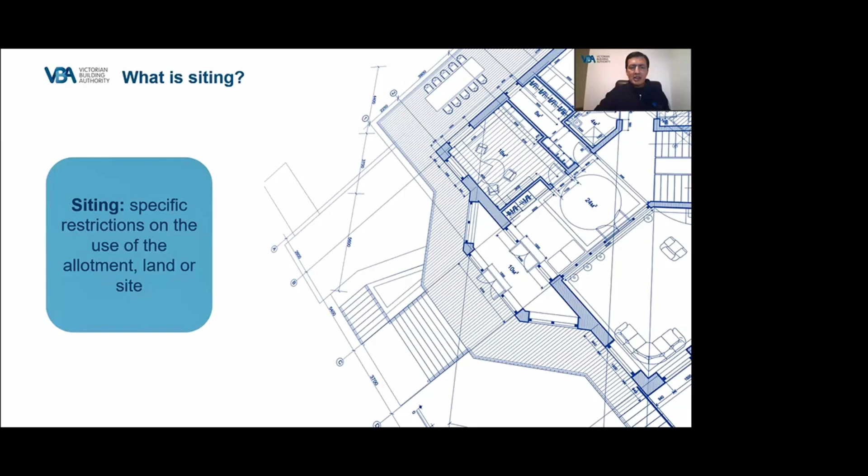To start us off, we're going to discuss siting and what it is for those who may be unaware. So what is siting? Siting refers to specific restrictions on the use of a land, allotment or site. These restrictions are put in place to protect the preferred neighbourhood character, minimise the impact from newly constructed dwellings, and protect the amenity of the surrounding properties.

The regulations consider matters such as the placement of the building on an allotment in terms of site coverage, the distance from allotment boundaries, and the height of the building, etc. It also considers matters such as overlooking into adjoining properties, overshadowing of adjoining property, provision of daylight, car parking, and required garden areas, amongst others such as placement of sheds and fences.

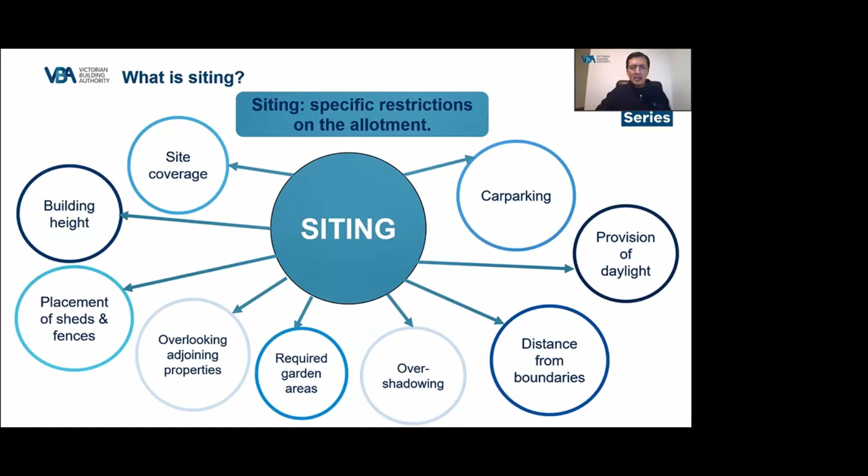We'll now move on to discuss a few matters relating to how the siting requirements of Part 5 are applied. Part 5 of the regulations contains requirements for siting matters that apply to the construction of single Class 1 buildings, Class 10A buildings and Class 10B structures, as defined under the National Construction Code or NCC, and also for small second dwellings or SSDs as they're commonly referred to.

The regulations define an SSD as being a Class 1 building that is self-contained and has a gross floor area that is equal to or less than 60 square metres, that is on the same allotment as an existing building, that is a single Class 1 building, that is not a small second dwelling.

We will be presenting a webinar on small second dwellings in August for those who wish to know more about them. You can also refer to Practice Note SI03, Small Second Dwellings, which outlines the requirements specific to SSDs and will be published on the VBA website in the coming weeks.

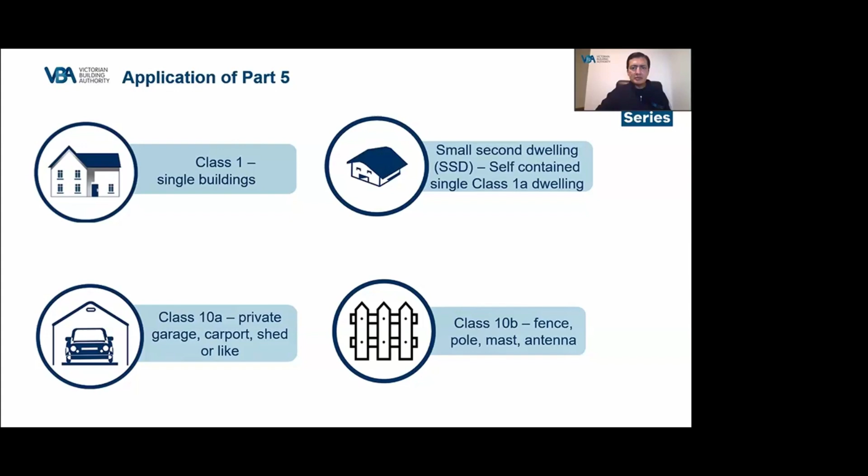The requirements in Part 5 are equivalent to those under the Victorian planning schemes, specifically Clause 54 of the Victorian Planning Provisions or the VPP. However, Part 5 of the building regulations does not apply where there is a planning permit required for the construction of the building and the relevant planning scheme regulates the same matters under the regulations.

Many of these regulations refer to an existing building or dwelling on the adjoining allotment, which is defined under Regulation 69 as being a building that existed complete before the 1st of July 1994, that has an occupancy permit which Council has a copy of, where there is a certificate of final inspection but only where an occupancy permit is not required, or that was completed and can be occupied without an occupancy permit or certificate of final inspection.

There is also a definition for single dwelling under the regulations, which means a Class 1 building and any Class 10 building associated with the Class 1 building.

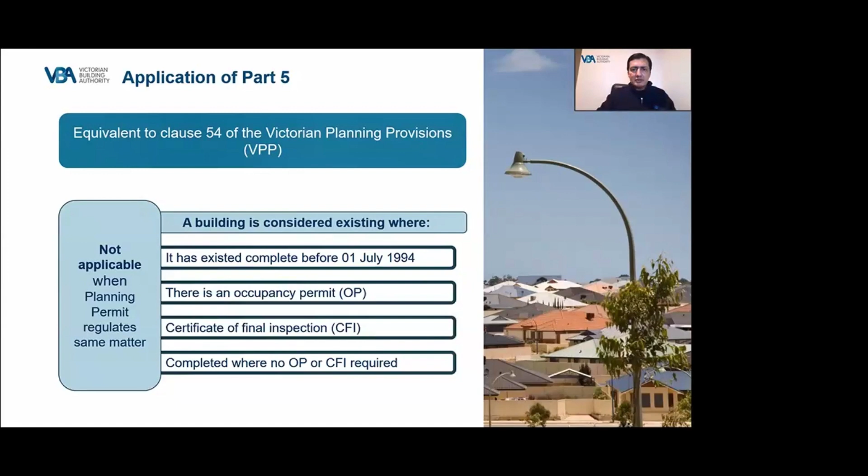The other thing to consider under Part 5 of the regulations is whether the proposed building is to be constructed in what is known as an approved building envelope, in accordance with Regulation 71.

Approved building envelopes are typically on title and are defined under the regulations as being documented design parameters that deal with the siting matters under Part 5, that are specified in a planning permit for the subdivision of land on or after the 1st of July 1994, and either made an agreement under Section 173 of the Planning and Environment Act 1987, or shown as restrictions on the certified plan of subdivision, which is on the transfer of land register.

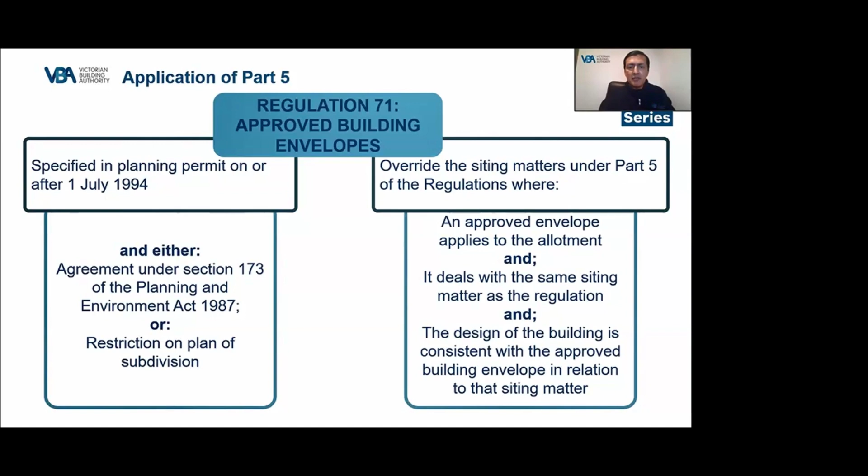An approved building envelope will override the siting matters under Part 5 of the regulations, where an approved envelope applies to the allotment and it deals with the same siting matter as the regulation, and the design of the building is consistent with the approved envelope in relation to that siting matter.

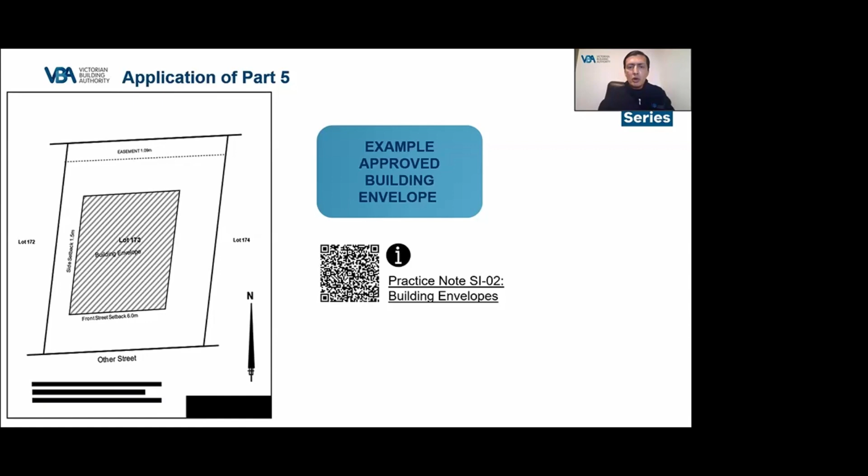We now have a short quiz for you, with the first question being: where an occupancy permit is required, a building is considered existing if a certificate of final inspection has been issued. True or false? Question 2: An approved building envelope overrides the siting requirements under Part 5 of the Building Regulations 2018. True or false? Let's see how you go.

Question 1, the correct answer is B, false. It's an occupancy permit. Answer to question 2, the correct answer is A, true.

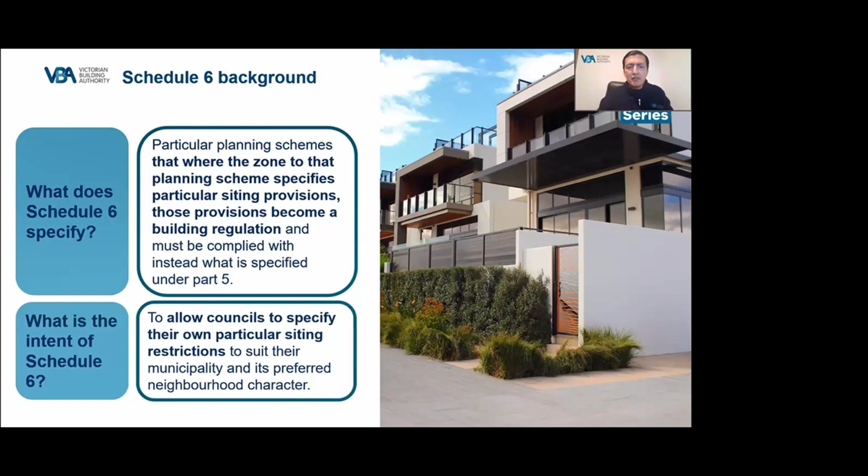The particular regulations that are affected by the planning schemes under Schedule 6 are Regulations 74.1, Minimum Street Setback; 75.1, Building Height; 76.1, Site Coverage; 76A, Minimum Garden Area; 77.1, Permeability; 79.1, Side and Rear Setbacks; 80, Sub-Regulation 2, Walls and Carports on Boundaries; 86.1, Private Open Space; and 89.1, Front Fence Height.

We will discuss some of these regulations in more detail later on in the session.

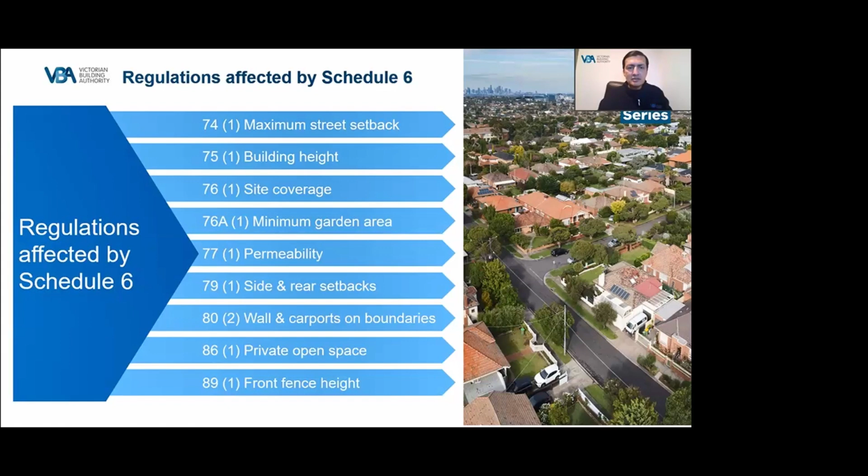While the particular planning schemes and affected regulations are listed in Schedule 6 of the Building Regulations, the exact siting restriction still needs to be determined. In order to determine this, the VBA suggests obtaining advice from council in writing as to what the exact restrictions are. Alternatively, you can access the planning schemes online to determine what the restrictions are.

We're now going to do something a little different and show you a short video on how you can access these requirements online by using the QR code or link on the bottom left of your screen.

We're now going to show you how you can access the planning scheme requirements under the schedule to the zone for the planning scheme that's specified under Schedule 6 for a particular allotment that you're considering. So if you use the QR code on the left side of the screen or the link, it'll bring you to this website, which is...

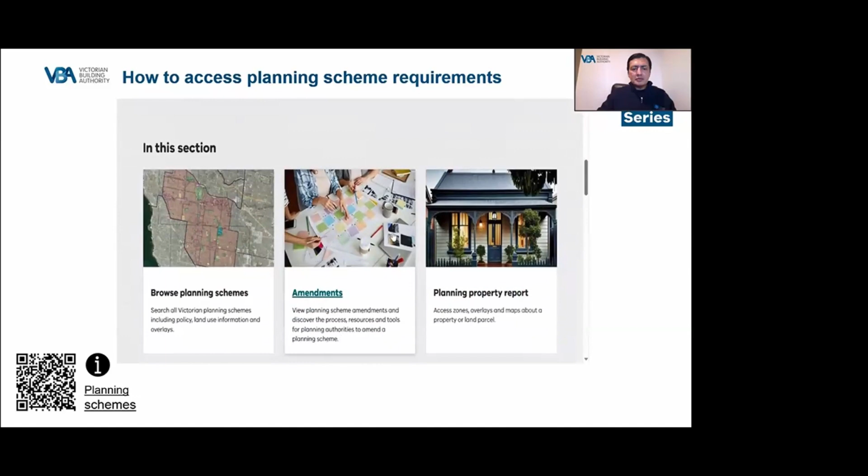www.planning.vic.gov.au/planningschemes. Now, this is the home page of that website, and if you scroll down, you'll see a number of windows. The window on the right hand side says Planning Property Report. We'll click on that one. That'll allow you to search for a planning property report for a particular allotment.

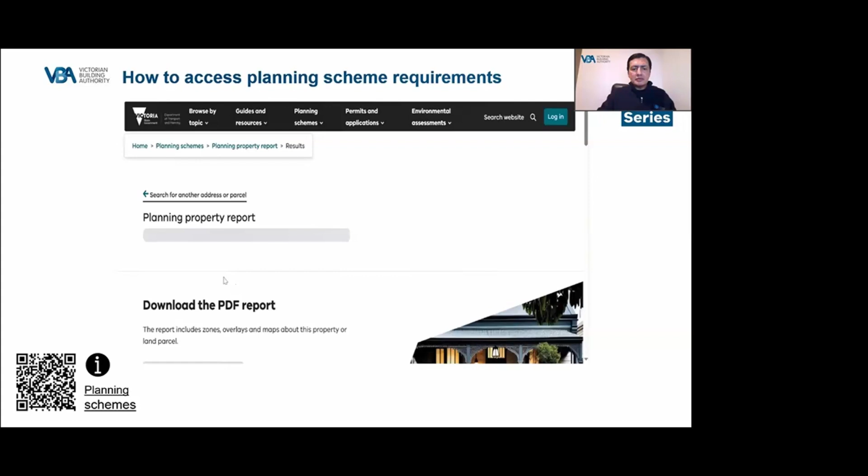For our purposes, I'm just going to pluck an address out of the sky. I'll just say number 10 and use my surname, which is Williams, and we'll choose 10 Williams Avenue, Churchill, and that will allow us to download a copy of the planning property report for that particular allotment. So we'll download a copy of this report.

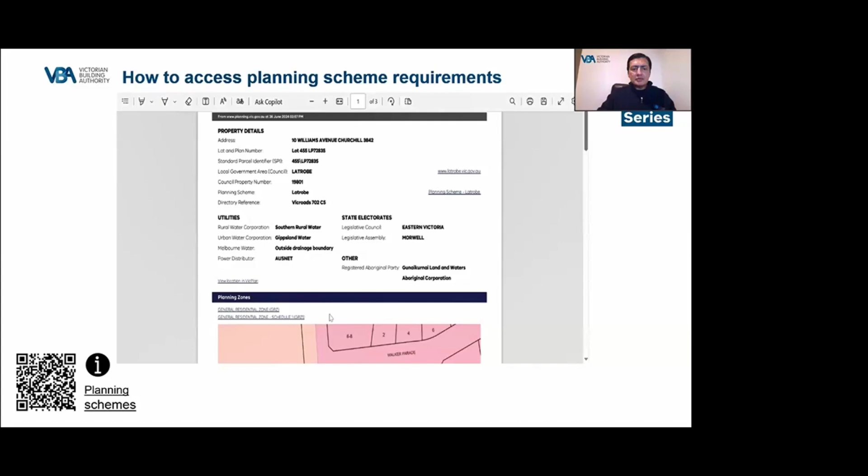This report gives you a number of requirements specified under the planning scheme. The first page shows you what the zones are. You can see marked in red, that's our particular allotment, which is 10 Williams Avenue, Churchill.

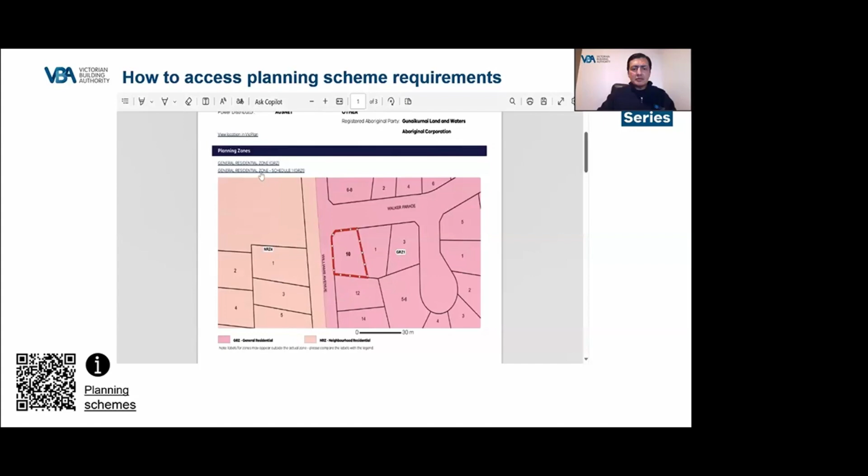Underneath the heading of planning zones, there are two links: one to the general residential zone and one to the general residential zone Schedule 1. Because the requirements we're looking for apply in the schedules, that's the link we'll choose. If we click on the link to the schedule, that should bring up the requirements for this planning scheme, which is the Latrobe planning scheme, City of Latrobe.

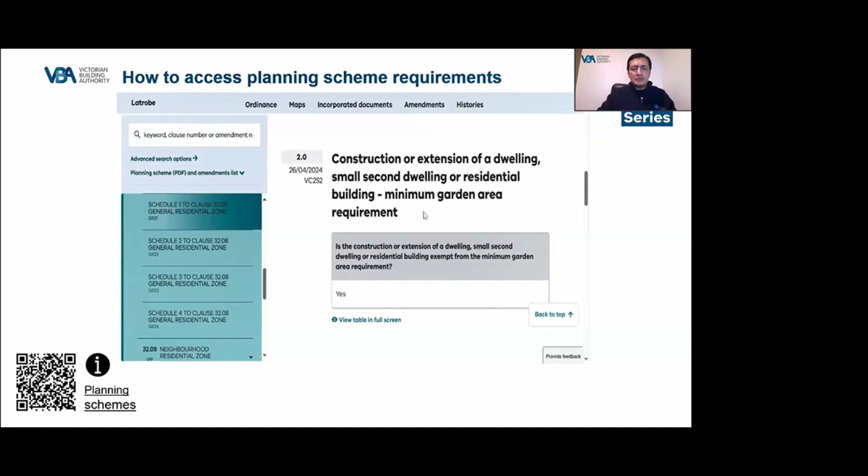If we scroll down, we'll start to come to some requirements. That one's just an exemption from the minimum garden area under the planning scheme. In that case, Part 5 of the building regulations will apply, and we will be applying those minimum garden requirements as per Part 5.

This table relates to clauses 54 and 55, 54 relating to the construction of a single dwelling. We can zoom up on that table, and this table will specify the requirements for that site under that schedule. You can see there's nothing specified for minimum street setback, nothing specified for site coverage, and nothing specified for permeability. In that case, for those three matters, the siting requirements of Part 5 will apply because there's nothing specified in the schedule.

But if we scroll down further, we can see there's a requirement for side and rear setbacks specified under the schedule, which is 1.5 metres, an increase of 500 millimetres over Part 5 of the building regulations. Because this is a specification in the schedule to the zone that applies under Schedule 6 of our building regulations, it then becomes a building regulation, and that's what must apply.

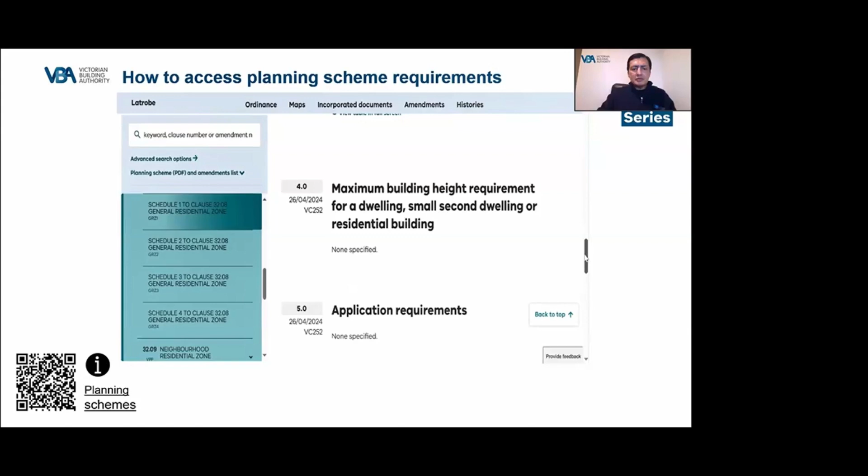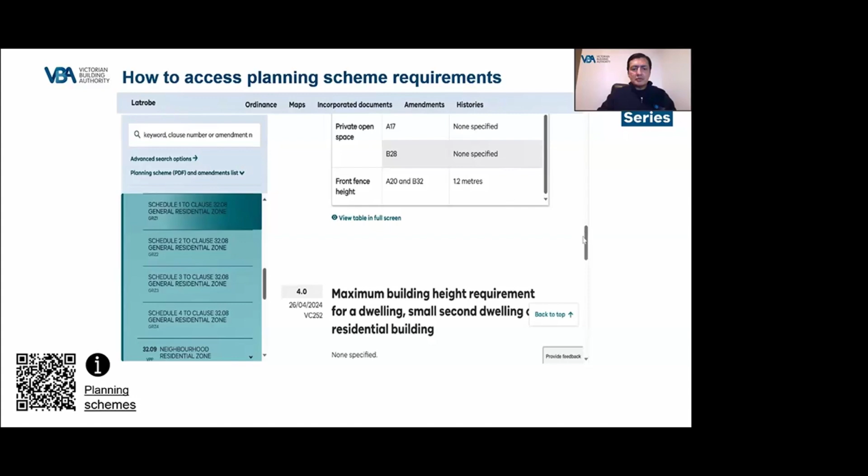So there's no further requirements under that table. There's nothing specified for maximum building height and no other requirements specified under that schedule. Therefore, it's only those two items in the table that are applicable, which is the side and rear setbacks and the front fence height, that must be applied to the dwelling in accordance with this schedule. Everything else will need to comply with Part 5. It's as simple as that.

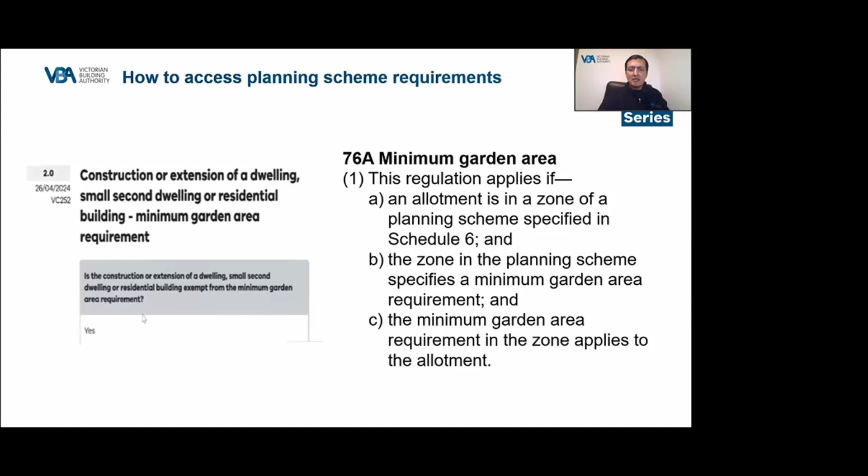So we come to quiz time again. First question of the quiz. Schedule 6 of the Building Regulations 2018 applies where: A, a planning permit is required; or B, there is a non-compliance with the regulation under Part 5; or C, the schedule to the zone of the planning scheme regulates the same matter under Part 5.

Question 2. Schedule 6 of the Building Regulations 2018 overrides the regulations under Part 5: A, at all times; B, only where the schedule to the zone in the planning scheme regulates the same matter under Part 5; or C, where there is a non-compliance with the regulation under Part 5. Let's see how you go again.

The answer to question 1, the correct answer is C. The schedule to the zone of the planning scheme regulates the same matter under Part 5.

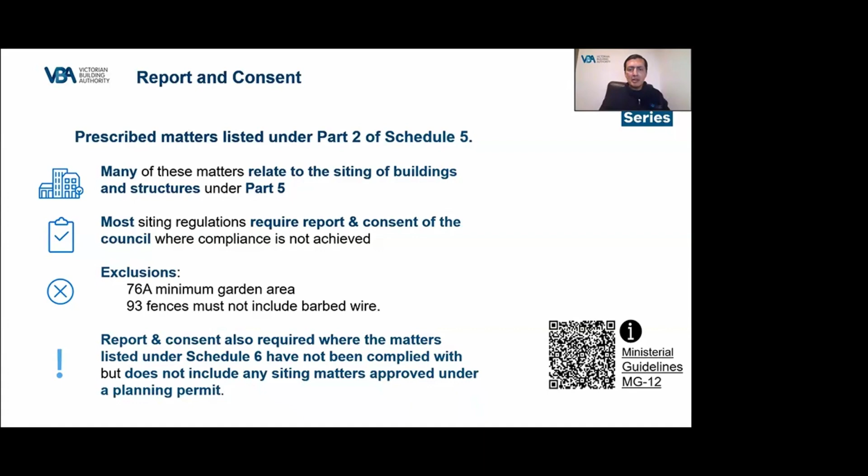Report and consent must be applied for prior to the issue of a building permit, as council are unable to issue a retrospective report and consent.

When assessing an application for report and consent, council will use Ministerial Guideline MG12 to assist in their decision making, which can be seen on the right of the screen.

The applicant for a report and consent may wish to use MG12 to assist them in determining whether the proposed design will satisfy council.

In addition to MG12, council will usually also consult with the affected adjoining property owners to determine if there are any valid objections to the application for report and consent.

It's important to note that where a building permit has already been issued and a non-compliance with a siting regulation is found, a report and consent cannot be obtained.

Alternatively, the relevant building surveyor can take enforcement action in the form of a building notice, or the applicant for the building permit can make an application to the Building Appeals Board to modify the particular regulation in accordance with Section 160 of the Building Act 1993.

We once again have a quick quiz for you. Question 1: A report and consent is not required where there is a non-compliance with siting provisions called up by Schedule 6 of the Building Regulations 2018. True or false?

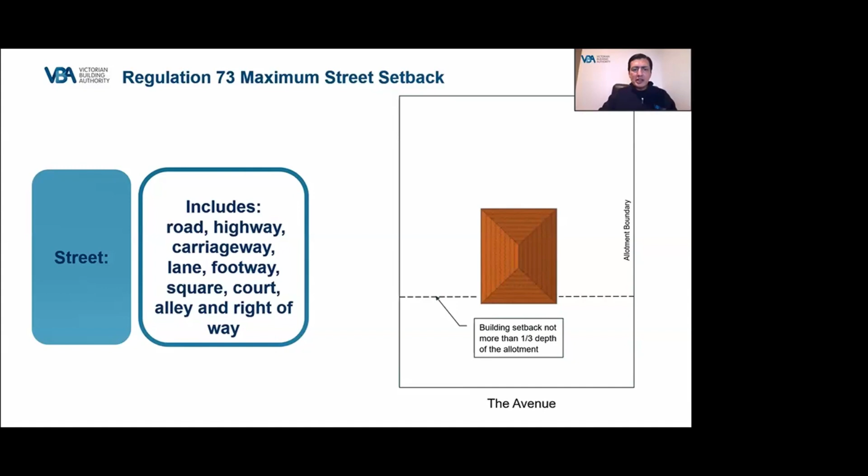Regulation 73 restricts the maximum distance that a Class 1 building may be set back from a street alignment to preserve the preferred streetscape and make efficient use of the site.

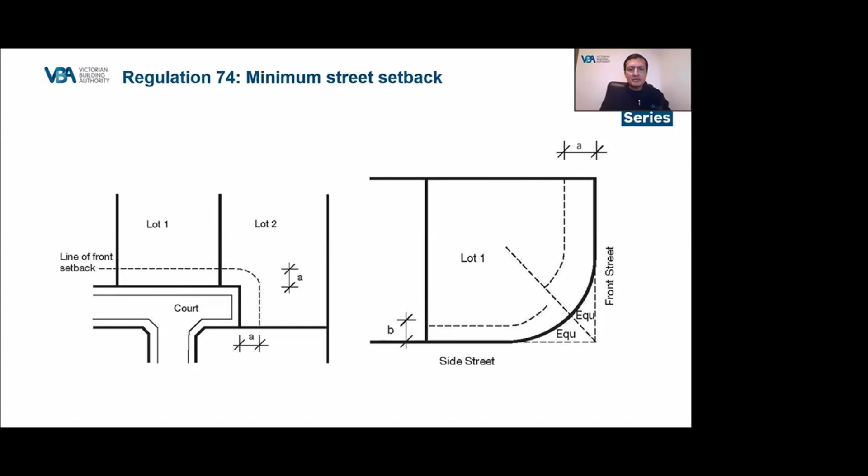The minimum street setback is measured within 90 degrees or less from the wall of a building that is facing the street. However, Regulation 74 specifically excludes a lane, footway, alley or right-of-way.

So how do you determine which is the front street alignment in these cases? Well, in these cases, it's typically the wall of the building that presents as the architectural frontage of the building that is considered the front wall of the building and is therefore where the front street setback should be taken from.

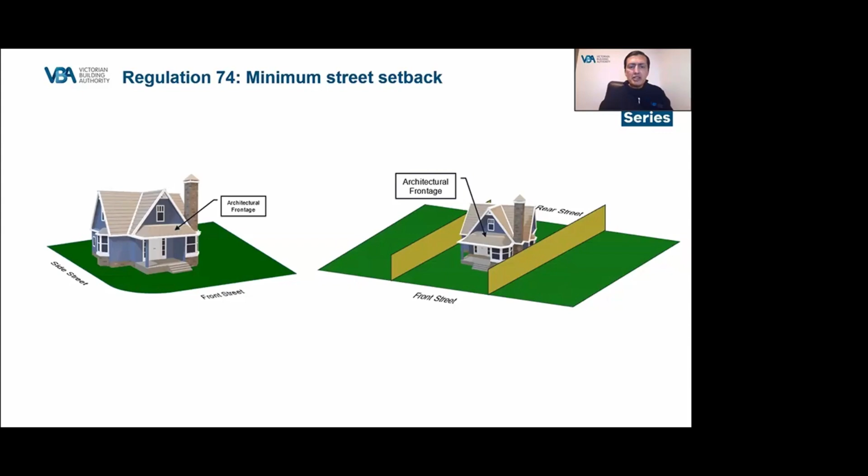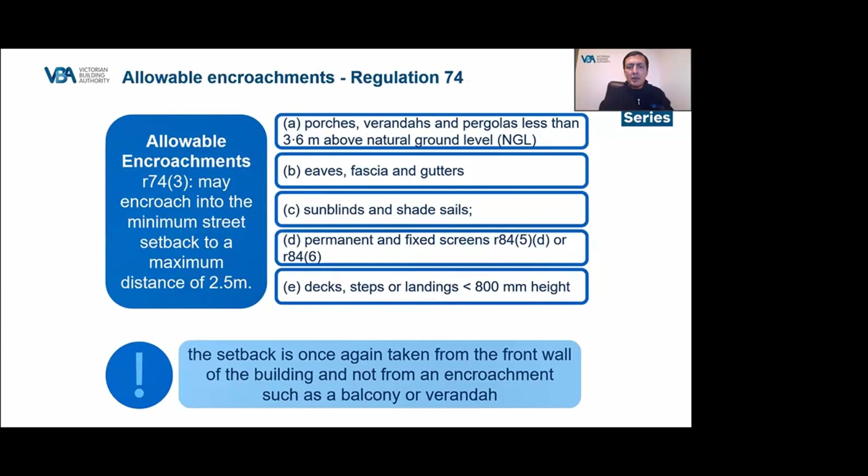There are a number of allowable encroachments listed under Regulation 74.3, which may encroach into the minimum street setback to a maximum distance of 2.5 metres. These consist of porches, verandas and pergolas with a maximum height of less than 3.6 metres above natural ground level, eaves, fascias and gutters, sun blinds and shade sails, permanent and fixed screens referred to in Regulation 84, decks, steps or landings less than 800 millimetres in height. Note that the setback is taken from the front wall of the building and not from an encroachment such as a balcony or veranda.

So how is the maximum height measured? The regulations define height of a building as the vertical distance between the natural ground level and the top of the roof covering. This means the maximum height must not be exceeded at any point measured between the natural ground level and the top of the roof. Chimneys, flues and service pipes are not included when measuring building height.

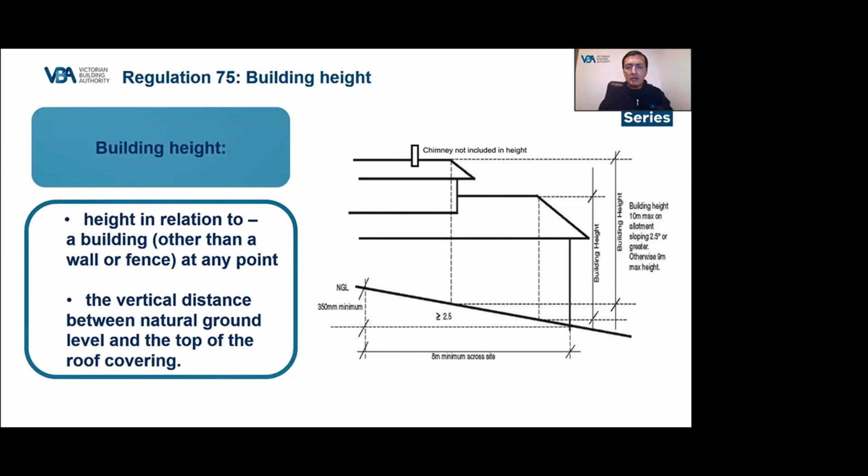So what is natural ground level then? Unfortunately, natural ground level, or NGL, is not defined under the regulations. It is typically taken as being natural, undisturbed ground. However, where a new subdivision has had reshaping earthworks, the new levels may be taken as the natural ground level, provided that the adjoining allotments across the development have also been subject to the same earthworks or are at the same level.

Sometimes it may be difficult to determine where natural ground level is, for example where the subject allotment has had cut and fill earthworks. In these cases, natural ground level may be taken as the line across the allotment connecting any two points within the allotment or adjoining allotments that can reasonably be considered natural ground level, as shown in the figure on the screen.

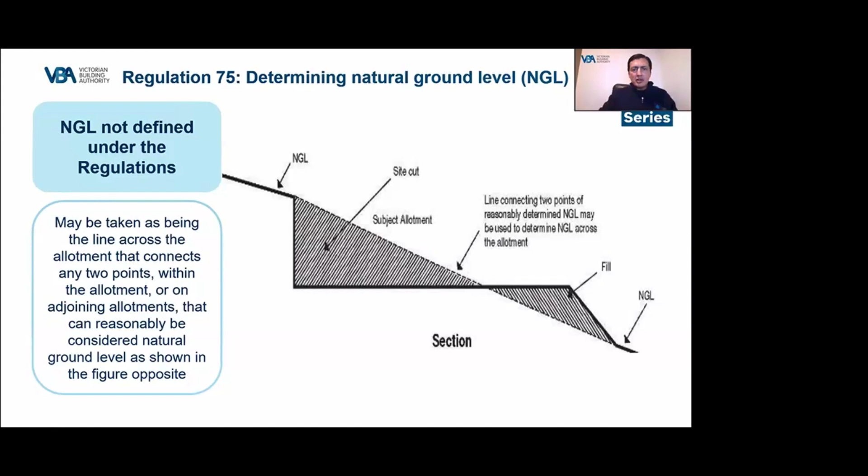The next regulation we will discuss is Regulation 79, Side and Rear Setbacks. The purpose of Regulation 79 is to provide adequate separation between the proposed building and the buildings on adjoining allotments, particularly above ground floor level.

Where over 6.9 metres in height, the building must be set back 2 metres plus an additional 1 metre for every metre of height above 6.9 metres. However, whatever the case, the maximum building height under Regulation 74 must not be exceeded without first obtaining a report and consent from the Council. It's also important to note that where the wall of a building complies with Regulation 80, the provisions of Regulation 79 are not applicable.

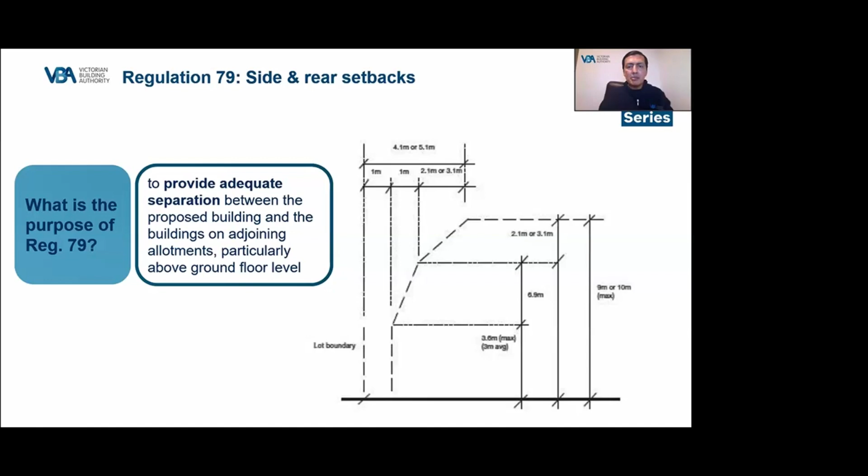There are also a number of allowable encroachments into the setback under Regulation 79, which may fully encroach into the required setback unless otherwise specified: landings not more than 2 square metres and less than 1 metre in height, unroofed stairways and ramps, pergolas, shade sails, eaves, fascias and gutters up to 600 millimetres, and carports that comply with Regulation 80. We'll discuss Regulation 80 in the next section.

There are also a number of allowable encroachments that may encroach 500 millimetres into the required setback, including porches and verandas, masonry chimneys, sun blinds, permanent and fixed screens referred to in Regulation 84, flues, pipes and rain heads, domestic fuel tanks and water tanks, and heating and cooling equipment and other services.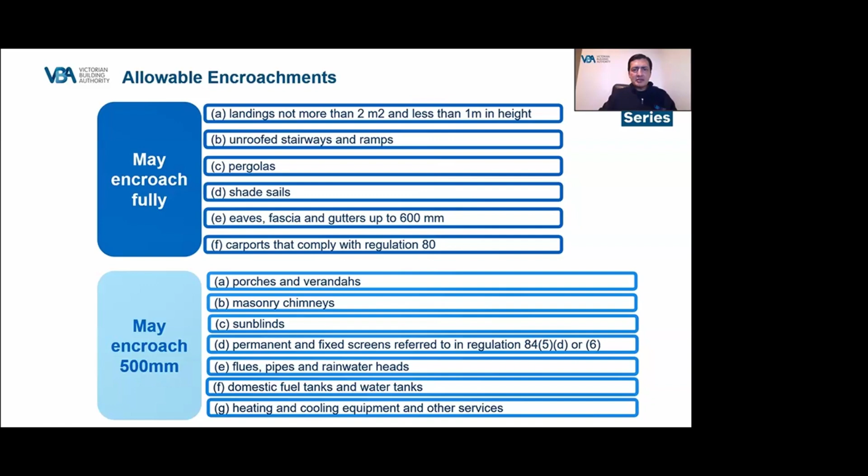In addition to the height and length requirements under Regulation 80 for walls and carports on or within 200 mils of the boundary, which applies parallel to the boundary, there are also height restrictions for the building perpendicular to the boundary under Regulation 75(3) that affect the wall under Regulation 80.

Perpendicular, meaning at right angles to the boundary. The figure on the screen shows the height restriction, which is that the height of the building must not exceed 3.6 metres for a distance of 1 metre taken perpendicular to the boundary, measured from the top of the wall to the 1 metre point.

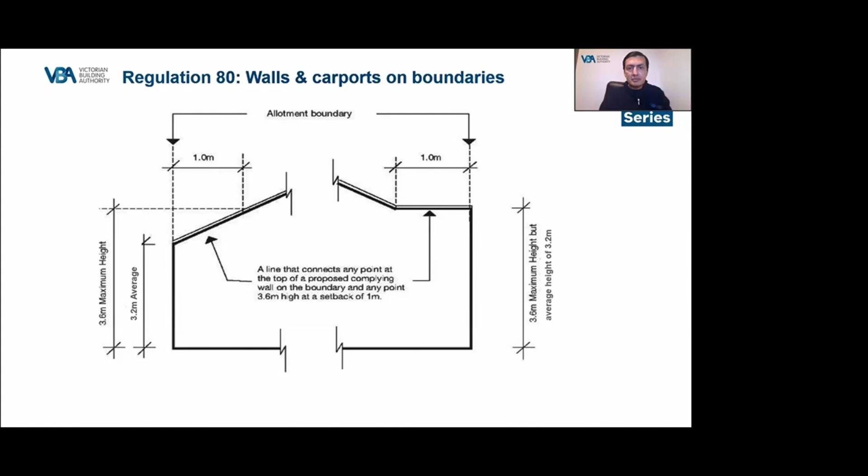Regulation 81 ensures that adequate daylight is provided to existing habitable room windows of a dwelling on an adjoining allotment. It provides for a light court with a minimum dimension of 1 metre perpendicular to the boundary, with a minimum area of 3 square metres. The dimensions of this light court must be measured clear to the sky.

The term clear to the sky is defined under the regulations and means an unroofed area or an area roofed with a material that transmits at least 90% of light, such as Laserlite roofing.

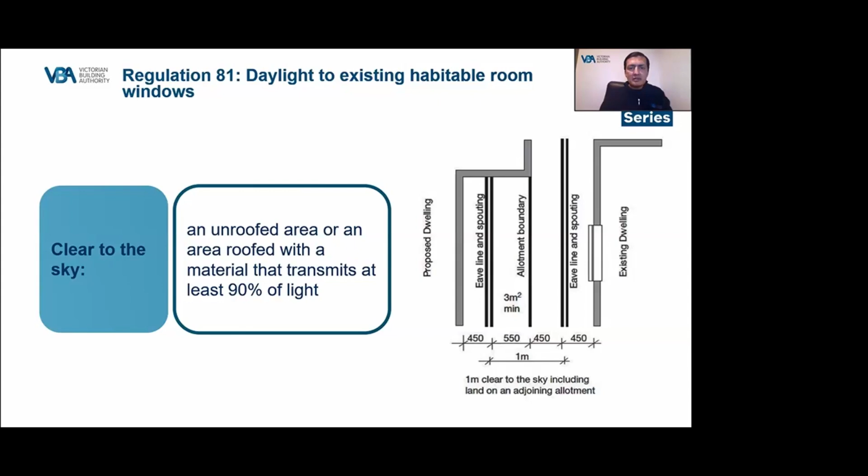Regulation 80 protects the amenity of adjoining properties by regulating the height and length of walls that are proposed to be on or within 200 mils of an allotment boundary, or carports within 1 metre of a boundary.

As shown in the figure on the left of the screen, this regulation restricts the height of walls on a boundary to an average height of 3.2 metres and a maximum height of 3.6 metres, excluding any part that's 2 metres in height.

It also restricts the length of the wall or a carport to 10 metres plus 25% of the remaining length of the boundary, as shown in the figure on the right of the screen.

It's important to note, however, that where a proposed wall or carport abuts an existing wall or carport on the adjoining allotment, the wall or the carport may be built to the same height as the existing wall or carport. This basically means the proposed and existing wall or carport will share the same part of the boundary.

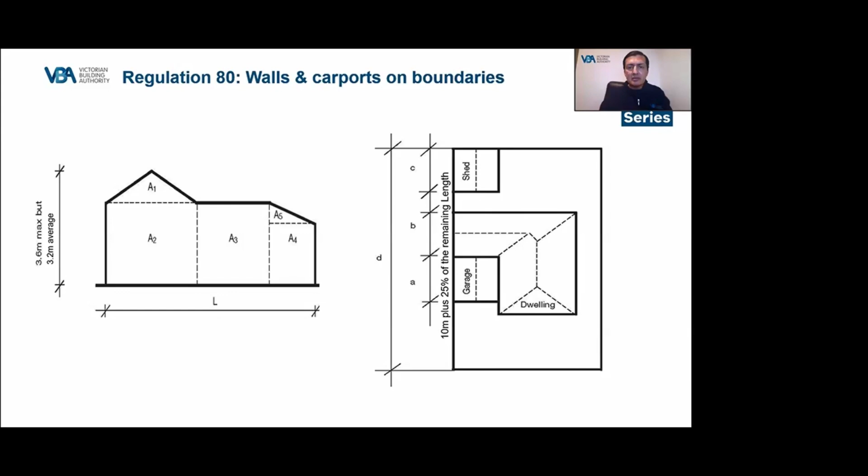In addition to the requirement for a light court, where a wall or carport with an average height of more than 3 metres is opposite a habitable room window in an existing dwelling on an adjoining allotment, it must be set back from that window at least half the height of the wall or carport if the wall or carport is within a 55-degree angle in the horizontal plane through the centre of the window, and may be swung on a 35-degree angle as shown on the figures in the screen.

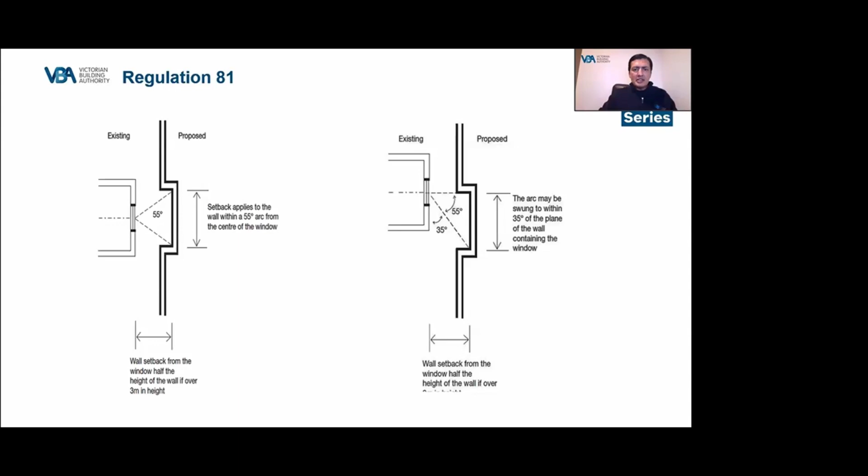Regulation 82 ensures that adequate sunlight is provided for north-facing windows which are orientated towards the boundary in an existing building on an adjoining allotment for passive solar heating.

Where the new dwelling will be within 3 metres of the existing habitable room window, the proposed building must be set back at least 3 metres from either side of the window, or that part of the window that is within 3 metres, as shown in the figure on the screen.

Similar to Regulation 75, this envelope starts at a point of 1 metre from the boundary facing the window to a maximum height of 3.6 metres at that point.

The setback is required to be increased by 1 metre plus an additional 600 millimetres for every metre of height over 3.6 metres up to 6.9 metres in height. Where over 6.9 metres in height, the building must be set back 3 metres plus an additional 1 metre for every metre in height above 6.9 metres.

Note that the 3 metre distance from the window is to be measured from the face of the glass itself and not from the frame of the window, brick reveals, external claddings or mouldings.

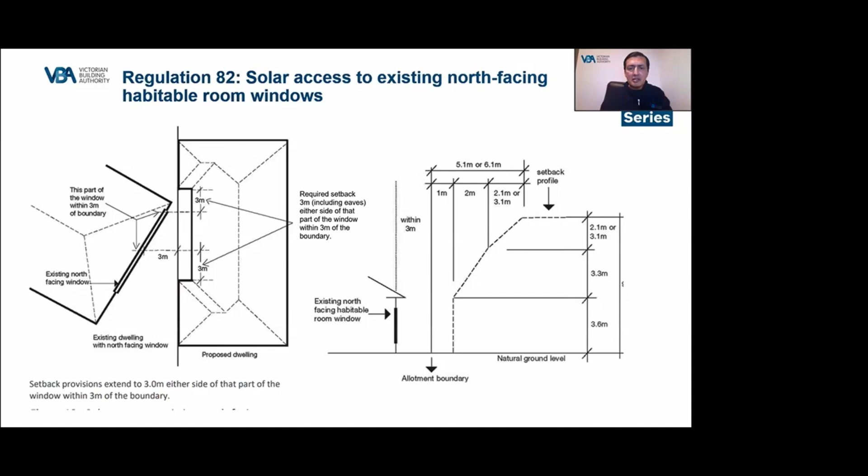There are also a number of allowable encroachments under Regulation 82 that are permitted to encroach up to 500 millimetres into the setback to a maximum height of 2.5 metres, consisting of flues and pipes, domestic fuel tanks and water tanks, heating and cooling equipment, and other services.

In addition, a rainwater head may encroach 500 millimetres into the setback.

What is also important to note about north-facing windows is that a reference to north is a reference to true north, not magnetic north, and applies as shown in the figure on the screen.

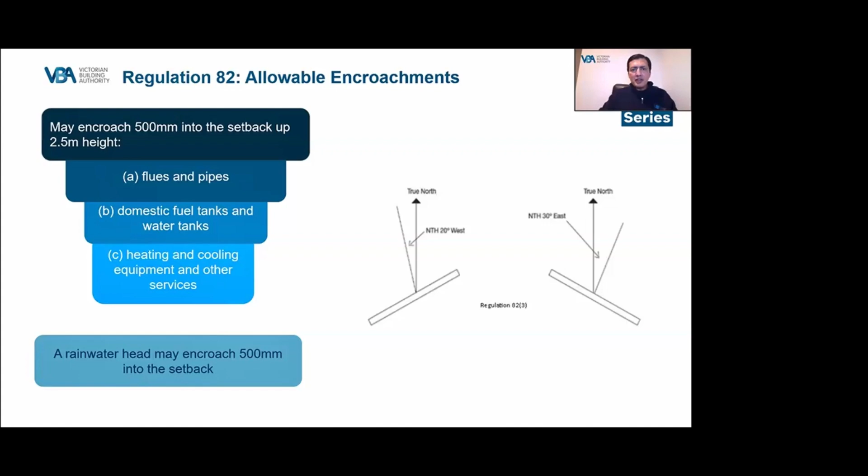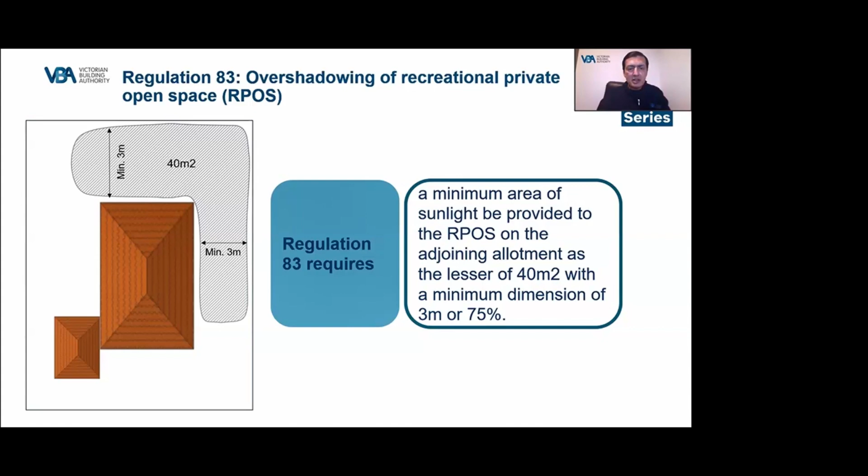Recreational private open space is defined under the regulations and means any part of a private open space in an allotment which is at the side or rear of an existing dwelling, including a small second dwelling on the allotment, or within the front setback of an existing dwelling, including a small second dwelling on the allotment, and which is screened for at least 90% of its perimeter by a wall, fence, or other barrier that is at least 1.5 metres high and has no more than 25% of its area open, and which is primarily intended for outdoor recreational activities.

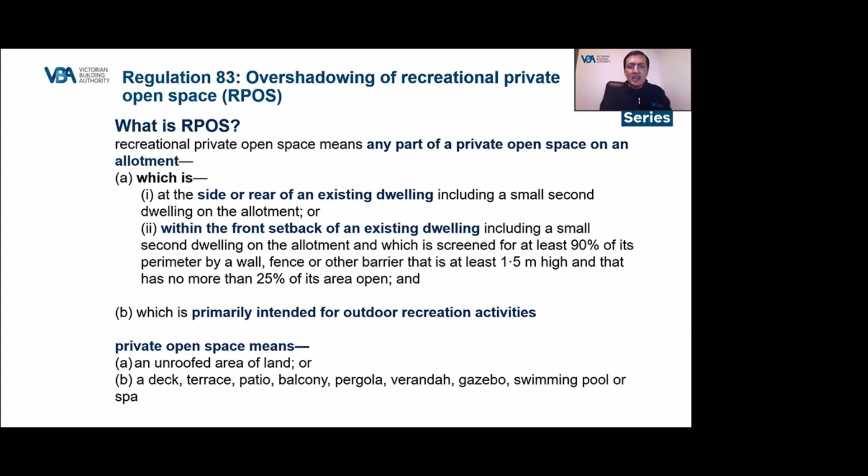Private open space is also defined under the regulations and means an unroofed area of land, or a deck, terrace, patio, balcony, pergola, veranda, gazebo, swimming pool or spa. Note that recreational private open space does not include driveways, dedicated clothesline areas, dedicated bin areas and other service areas, as they are not used for recreational purposes.

What you can see on your screen depicts an existing dwelling on an adjoining allotment on the right and a proposed dwelling on the left. The shadows cast are shown from the 6-hour period from 9 AM till 3 PM, including the shadows cast from the existing building itself and the existing structures on the site, including the boundary fence.

It's important to note that where the recreational private open space already doesn't have the required sunlight prior to the construction of the proposed building or extension between the hours of 9 AM and 3 PM on the 22nd of September, the sunlight to the recreational private open space must not be further reduced at all during the full 6-hour period. In addition, it's also important to note that when considering overshadowing, you exclude the shadows cast by any structures that would fit the definition of recreational private open space.

Therefore, as you can see in this example, the shadows cast by the veranda and the gazebo have been excluded, as they meet this definition. This is because Regulation 83 requires consideration of the shadows cast by the proposed building and other buildings and structures on the site. However, it does not require the shadow cast by a recreational private open space on the recreational private open space.

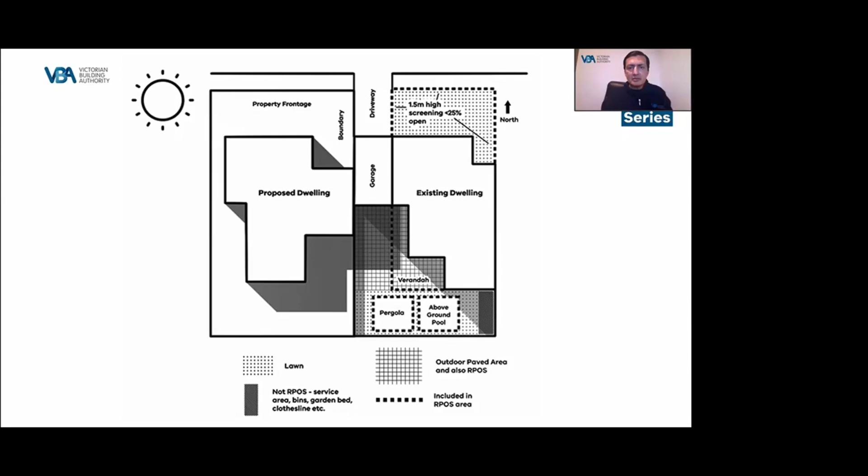The final regulation we're going to cover will be Regulation 84, which relates to overlooking. The purpose of this regulation is to protect existing habitable room windows and secluded private open space on adjoining allotments from overlooking where there is a direct line of sight from a habitable room window in a proposed building or from a raised open space, such as a decking.

Raised open space is defined under Regulation 84.10 and means a landing with an area of more than 2 metres squared, a balcony, a terrace, a deck or a patio.

Secluded private open space is also defined under Regulation 84.10 and means any part of a private open space on an allotment which is screened for at least 90% of its perimeter by a wall, fence or other barrier that is at least 1.5 metres high, that has no more than 25% of its area open, and which is primarily intended for outdoor recreational activities.

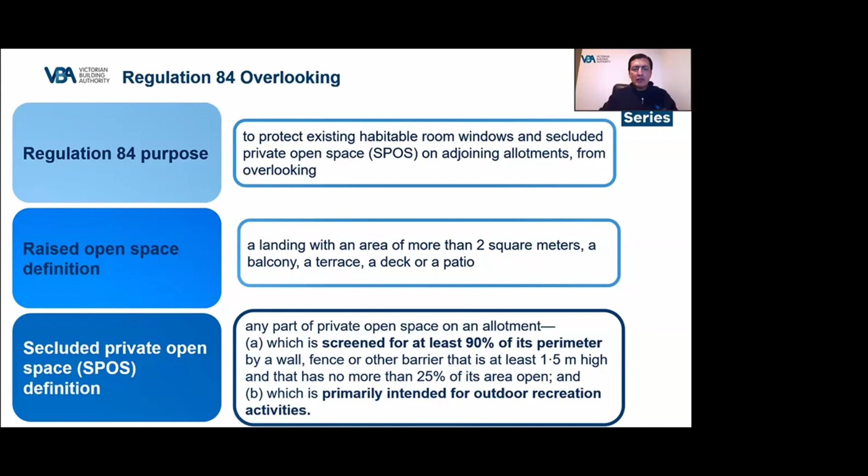With respect to where there is a direct line of sight into a habitable room window on the adjoining allotment, the line of sight is taken from 1.7 metres from the floor of the room with the window out at a 45-degree angle from either side of the window, being considered for overlooking. The distance of the line of sight is restricted to 9 metres.

Therefore, any habitable room windows that fall within this distance below the 1.7 metre high line of sight would not comply with this regulation. And as you can see in this figure, in this example, it is non-compliant. You can also see that the line of sight applies horizontally and the fence is blocking the line of sight from the ground floor.

Furthermore, the line of sight does not apply to looking upward, such as from the first floor window of the proposed building to the first floor window of the existing building in the figure.

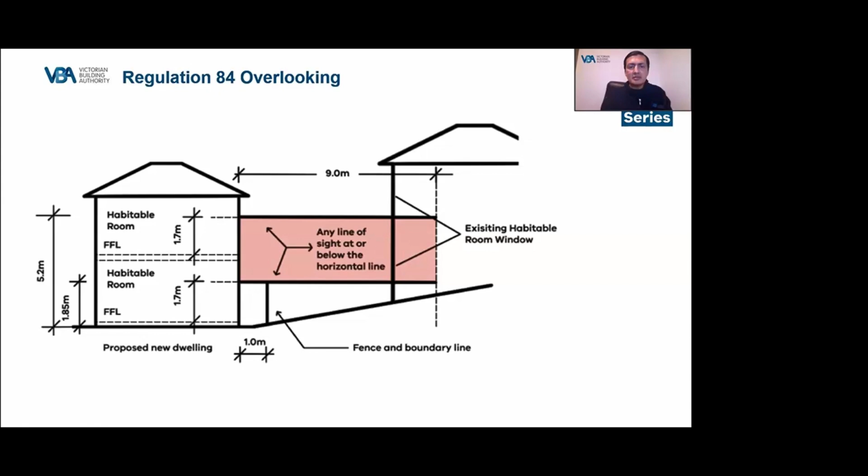Where a habitable room window is overlooking the existing habitable room window on the adjoining allotment, Regulation 84.5 has prescriptive provisions that, if complied with, will render the proposed window compliant.

These provisions are where the edge of the proposed habitable room window is offset a minimum of 1.5 metres from the edge of the existing habitable room window on the adjoining allotment, as you can see in the figure, where the proposed window has a sill height of at least 1.7 metres above floor level, if the proposed window has obscure glazing in any part of the window below 1.7 metres above floor level, or where the direct line of sight is obscured by a permanent and fixed screen that has no more than 25% of its area open.

Fixed typically meaning that the screen cannot be removed without the use of a tool.

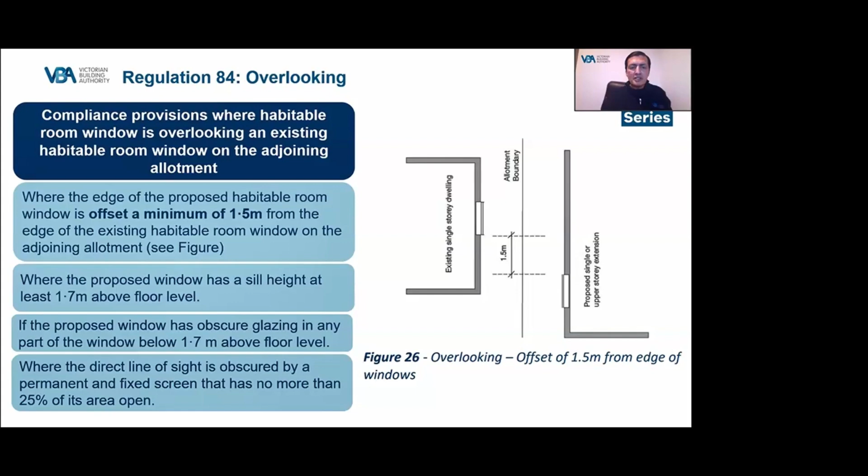The same type of screen may be used to achieve compliance, where a raised open space is overlooking a habitable room window or secluded private open space. Obscure windows or windows with screens may be openable, provided the opening does not permit a direct line of sight, as noted in the previous slide.

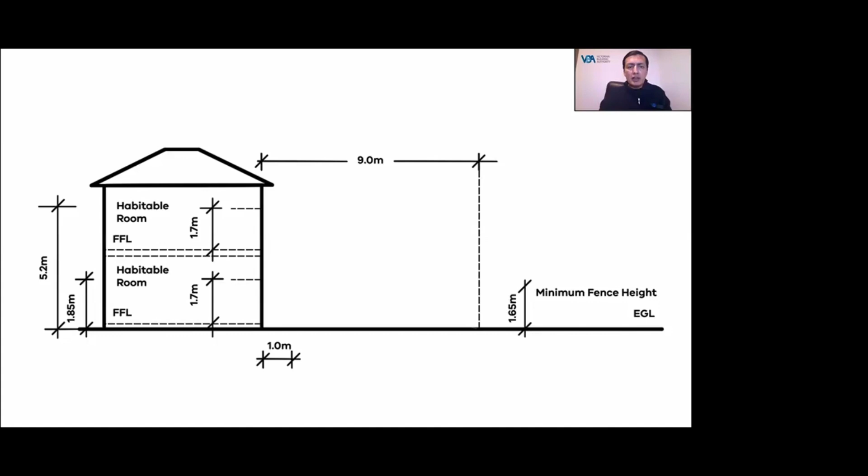This figure shows how the line of sight applies for overlooking of secluded private open space. Again, the line of sight starts at 1.7 metres height from the floor of the room with a window or from a raised open space, and out 45 degrees from either side of the window.

However, the difference with overlooking of secluded private open space is that the line of sight runs from the 1.7 metres height point at the proposed window and then runs downward to the point where it hits 9 metres, and does not apply horizontally like with the overlooking of habitable room windows. Any area within the secluded private open space of the adjoining allotment below that line that is not obstructed from view in accordance with Regulation 84 would be considered non-compliant.

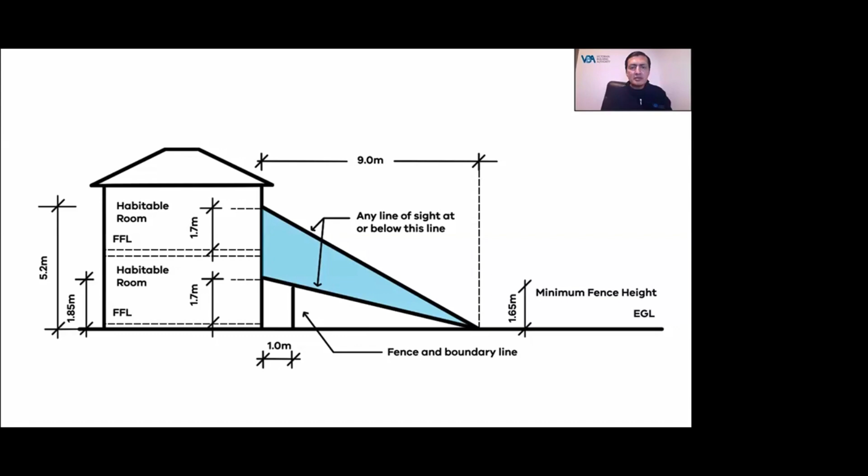We have another quick quiz. Question 1. What is the maximum distance a building can be set back from the front street alignment under Regulation 73? A. 6 metres, B. 1/3 the depth of the allotment, or C. 40% of the allotment.

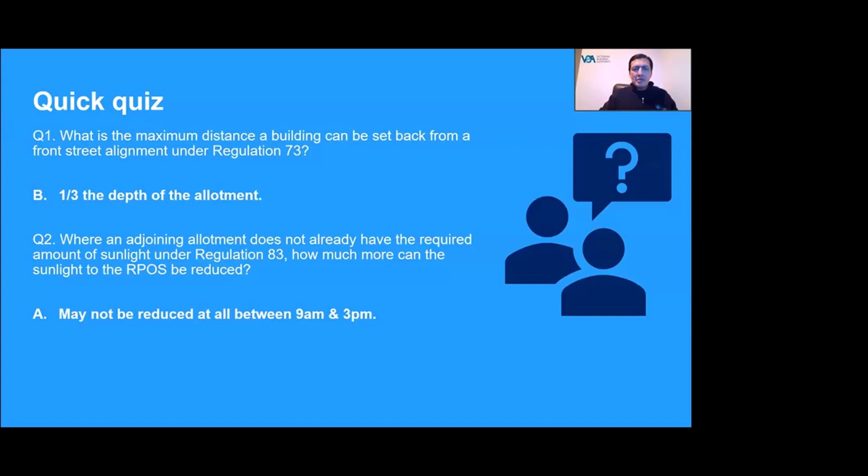To finish off the session today, a brief section on building permits. This section is basically a reminder for designers and builders that the plans that are submitted to the relevant building surveyor for approval must contain all relevant details to demonstrate compliance with the siting requirements of Part 5 of the building regulations.

This would include, for example, matters such as showing the lines of sight for overlooking and providing shadow diagrams showing overshadowing of adjoining property from the proposed building and any existing buildings and structures on the subject allotments for the full time period from 9 AM till 3 PM.

You'll be surprised quite often how the plans don't show the lines of sight for overlooking, or do not show the shadows in certain areas, or do not show the shadows for the full 6-hour period.

So today we've discussed what siting is, learned how Part 5 of the building regulations applies, how planning schemes relate to building regulations, and gained an understanding of the requirements for a number of specific siting regulations.